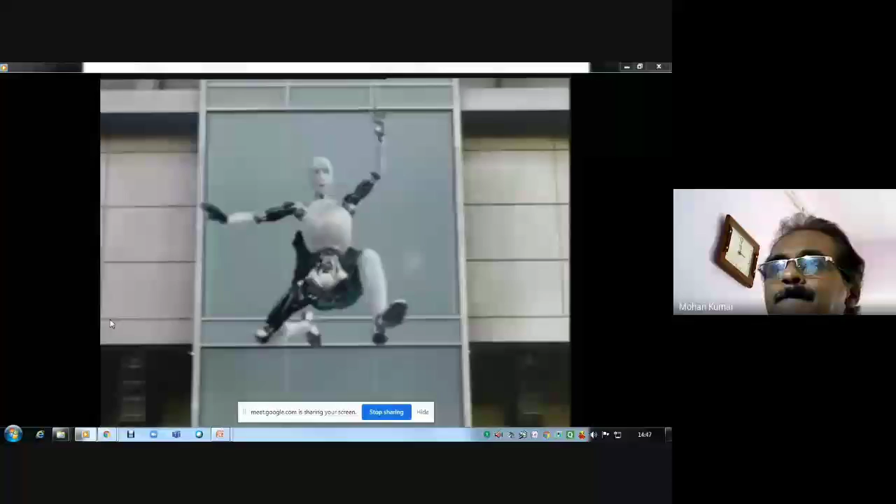So here in this video clip, what did you see? You saw 3 rules for the robot. These rules came mainly because scientists are afraid that robots are going to malfunction if they are implemented. The first generation scientists included Joseph Engelberger, father of robotics, then Unimation Company, Ford Motors Company, all these companies were involved. And there was Sir Isaac Asimov who made his rule and told that there should be a prescribed rule for robots.

Now that's what I was trying to show from that iRobot movie, that one of the robots was a very useful architectural robot. Within seconds it used to give any kind of imaginative picture to the scientist and discuss with him. The next robot you saw was a soldier which started misbehaving and fighting against the master. Then there are movies like Bicentennial Man, where a girl is asking that robot. Actually, that robot is a humanoid robot, a human thing transformed into a robot. That kind of concept, all flimsy concepts in robotics, started coming, and because of that, things started.

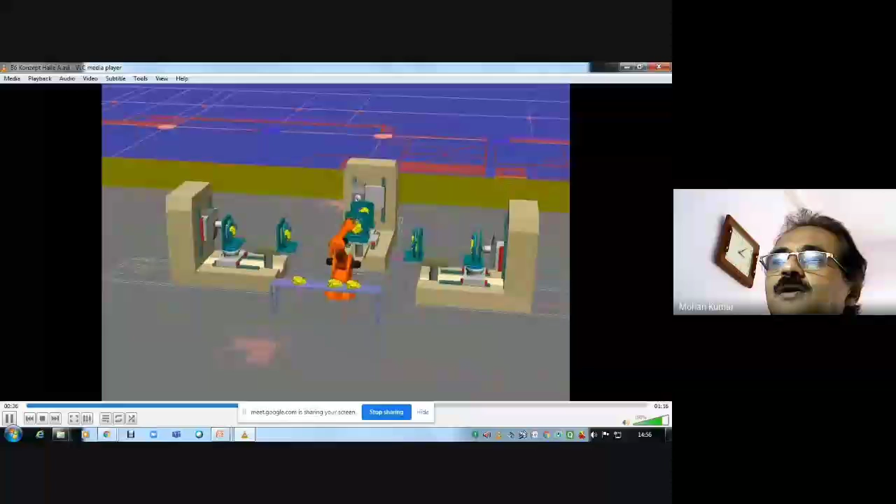Dhruv Kumar. Hello, Dhruv Kumar. Yes, sir. Are you seeing all this with clarity? Yes, sir, it's visible, sir. Yeah, visible. I can give explanation, commentary also here. Sir, actually... It's not necessary, okay.

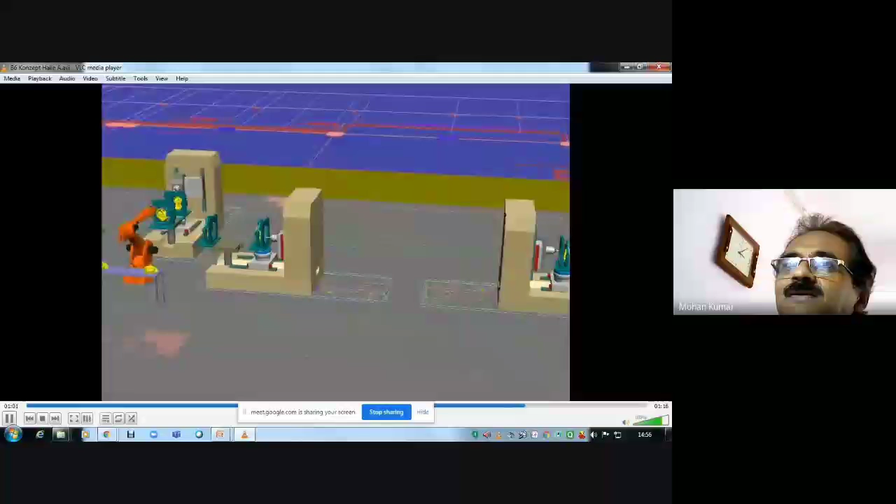So you can see, if you have a CAD/CAM software, robotic systems, everything can be drafted in 2D, and you can make an evolving 3D structure, and the entire simulation can be done on a worksheet. So this is the importance of this kind of robot.

And on that day, I was explaining to you, if you start seeing the real developments and advancements in robotics, I told you about the Mumbai Taj Attack. If you remember, it happened in, I think, 2008. It happened in Taj Hotel. The terrorists attacked so many residents of the hotel, killed them and everything.

But if you happen to have these micro and nano robots at that time, and made them completely sensor-controlled through some software, made as insect robots carrying each one drop of cyanide, then all these robots could have entered through a UGD duct, or through the UGD pipeline, or through the AC ducts, and stung all these terrorists within no time. That kind of technology is already coming up. People are working on nano robotics and other things.

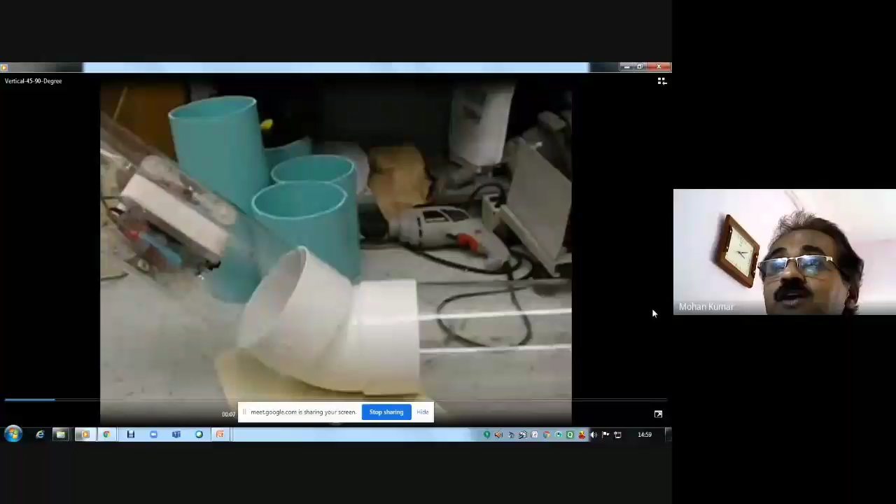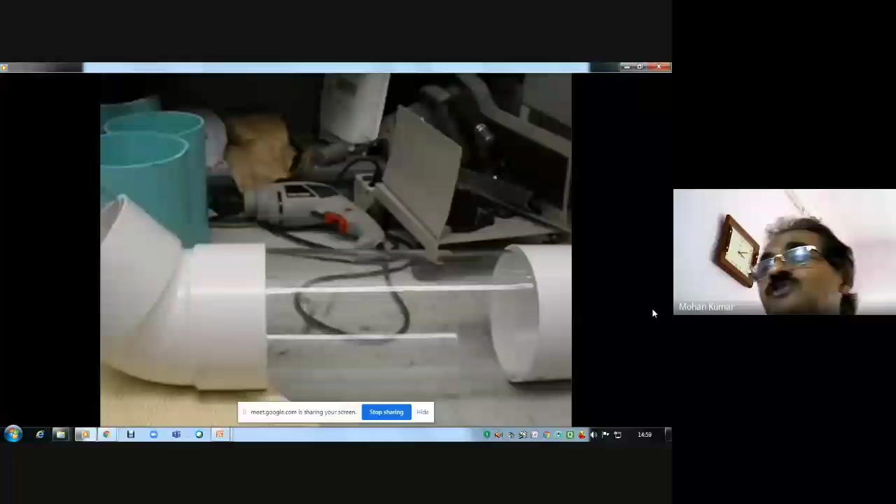This is a robot developed by Pennsylvania State University and Louisiana State University students over about 20 years, and it's going to be commercial. It enters through the UGD ducts, and it is totally leak-proof. It enters and goes through the pipes, cleans everything, and comes out very cleanly. This is a micro robot.

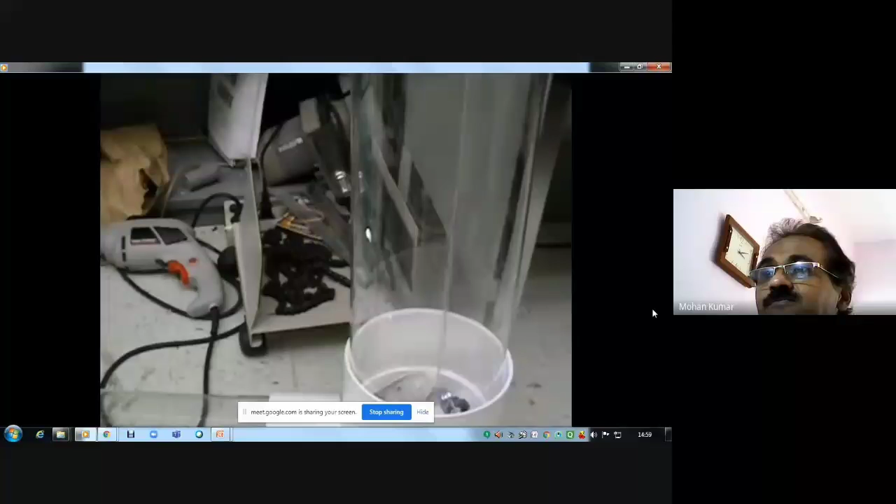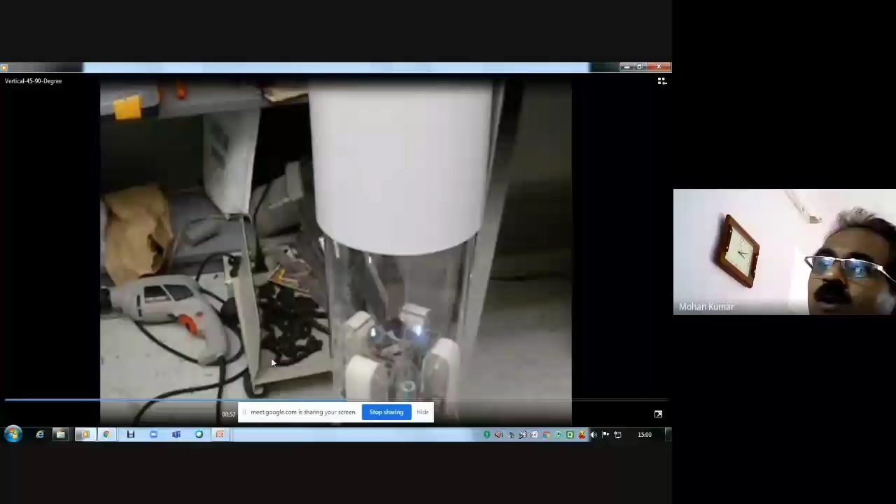So this is what it does. Actually, you'll have to analyze the components and everything yourself. You can always look into that. I'll stop it here and go to the next slides.

I'll show you here. I'll just quickly go through what it requires: the power of artificial intelligence, energy from the sun, and cutting-edge wireless communication.

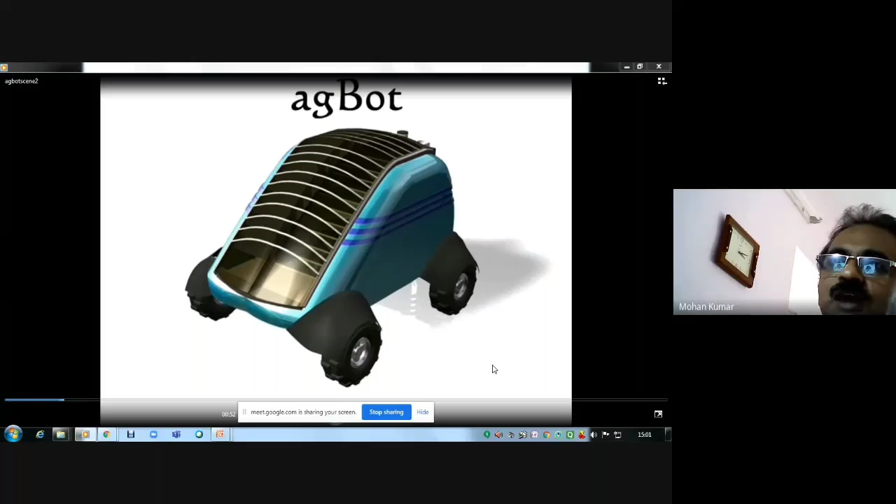Advanced mechanical engineering combined to create a marvelous entity called the AgBot. This is the AgBot, which has come commercially and is patented by Louisiana State University, and it is available for $5,000 US fully. It was worked out by 20 batches of students.

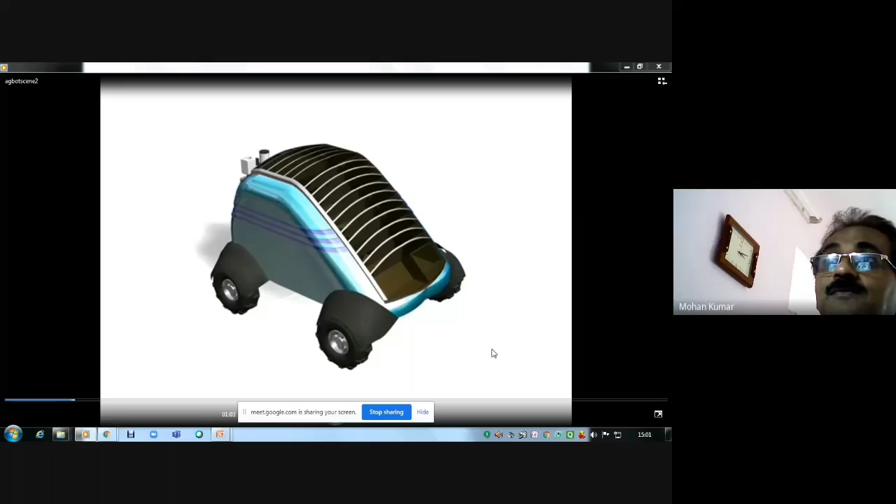It has an online GPS system. It has all these sowing, drilling equipment, manuring, fertilization, everything that you can see. See inside. Picture this: a healthy green lawn which is perfect.

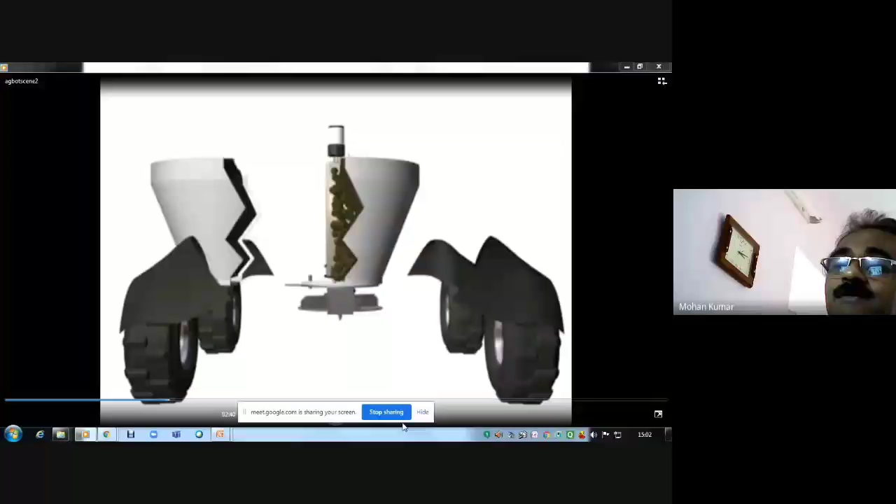What it is going to do is given here. I'll not go through again because it's going to take a lot of time. I'll go to the functioning of that. It is sufficient for a medium-sized backyard. I'll quickly run through because I showed it in the first lecture. See what all it contains. And it does fertilization, it does the sowing, seeding, everything.

It cuts the grass. AgBot uses advanced GPS technology. These are the things it does. Unlike charging, it avoids the manual process. The AgBot is equipped with sophisticated patented technology, which includes a seed hopper and GPS.

So you can see, first it will be fertilized. So many robots can work cooperatively.

What is beautiful about this robot is that it will guard your house while you are asleep at night. Now it will act as a watchman, equipped with a night vision pan and tilt camera. While guarding your house at night, if anyone tries to break in, using its advanced image processing software, it will immediately set off a loud alarm and take a snapshot of the intruder.

This is a beautiful product, and all of you can start working on these kinds of things, because this workshop has given really brainstorming insight into robotics. But I'll get into another beautiful video which tells the state of the art in robotics development. There's a robot called Nao. It's one of the world's best humanoid robots, which you can see here.

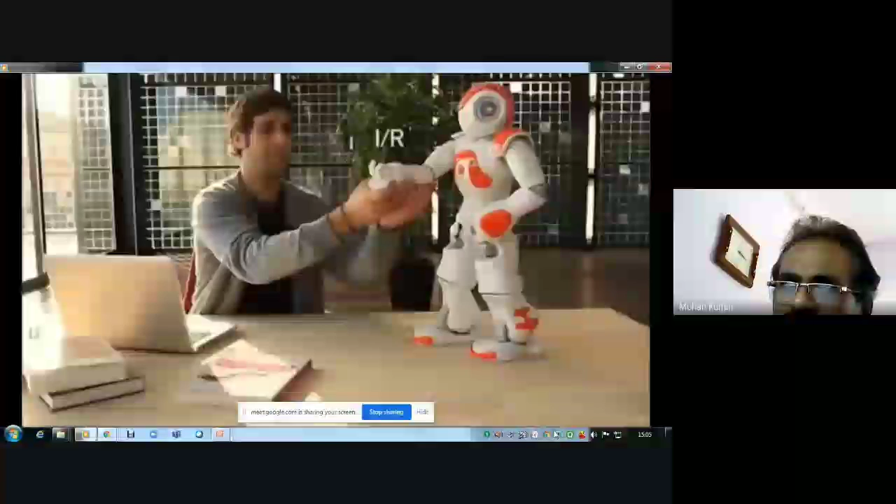See, everything is programmed here. And it has tactile sensing, infrared rays, Ethernet connection. Whole body motion is totally coordinated.

It has one beautiful phenomenon which you are going to see. Try again. There is going to be what is called a fall manager. You can see, now it's going to fall. Yeah, due to an obstacle, it falls. Immediately the fall manager, a software with an inertial sensor, picks it up on its own, and it gets up.

This is one of the very hard tasks in robotics. This man took 50 years to achieve it. It doesn't hurt.

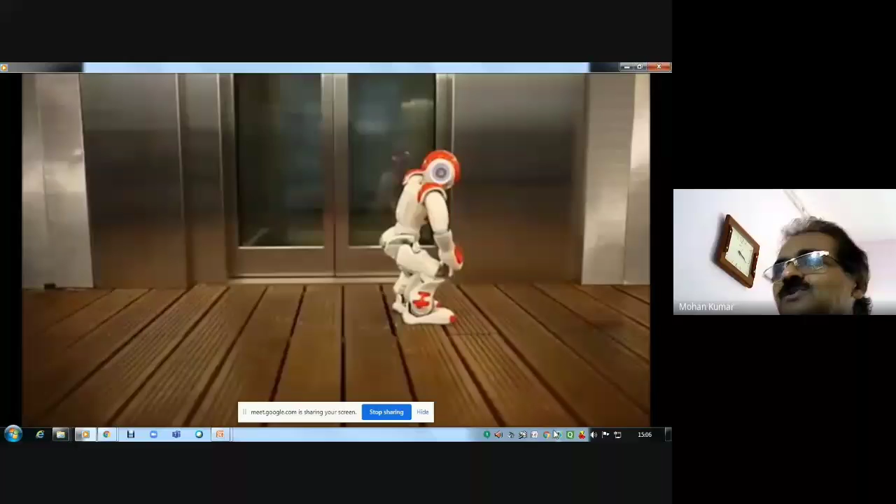So I'll simply run through, let us see. The same type of robot is Honda's Asimo robot, which you are seeing here. Let me get into some of the beautiful aspects of this. Honda Asimo, let us see what is going to happen.

This is a robotic revolution. It can go along with the crowd, put its arms along fellow colleagues, walk into the crowd, give public speeches, anything. It plays football, you are going to watch. It is playing football with Obama, the American president, also.

It recognizes people. It has every detail about this man now, and what he has come for, and is taking him into the corporate office. It avoids people, gives way to them. See?

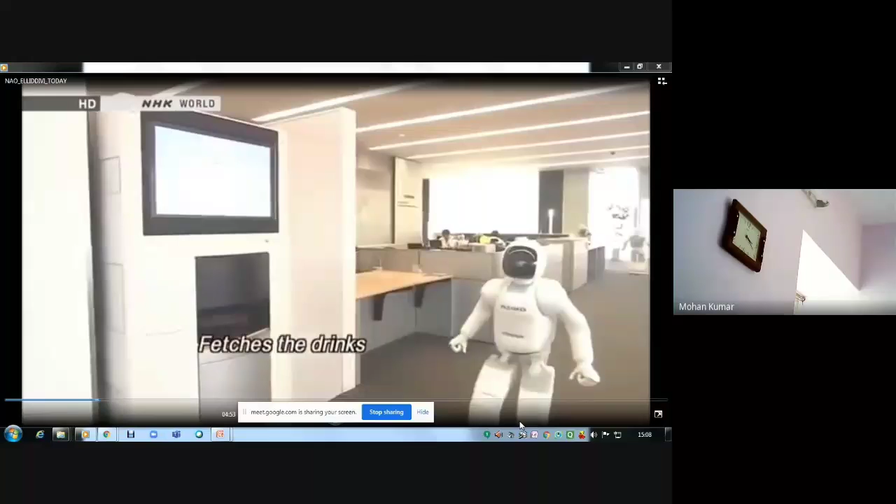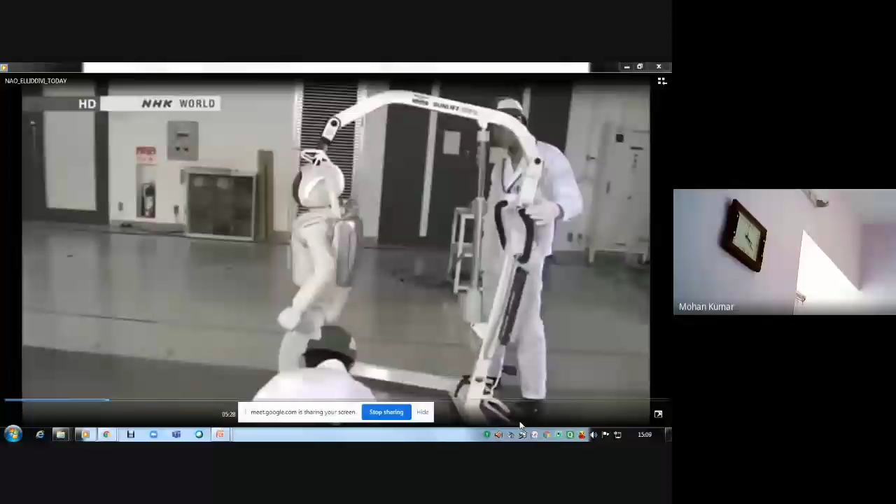Asimo was created by Honda's research and development subsidiary. We were allowed to film their top secret robotics laboratory. Japan is a worldwide leader in the development of humanoid robots. Asimo is the country's crowning achievement. Engineers continue to make improvements.

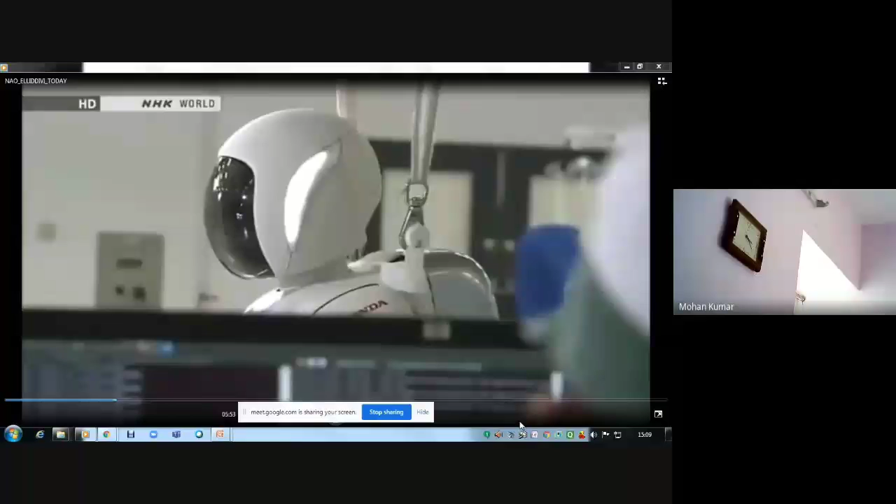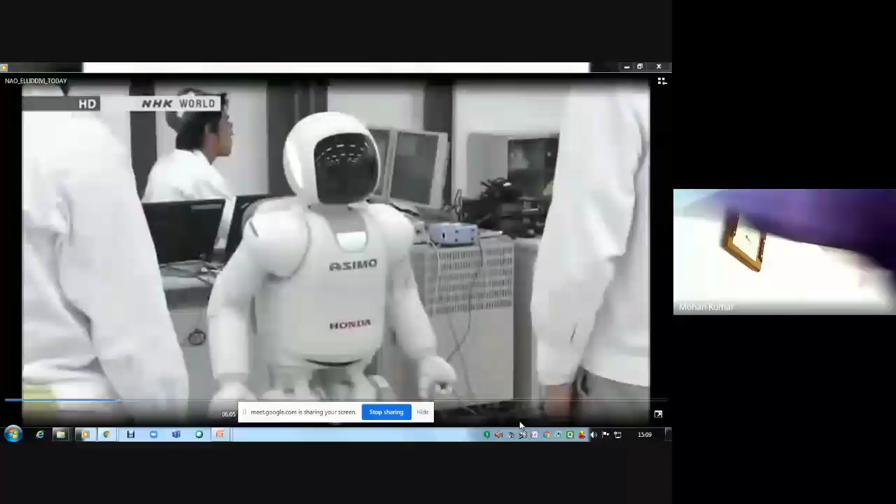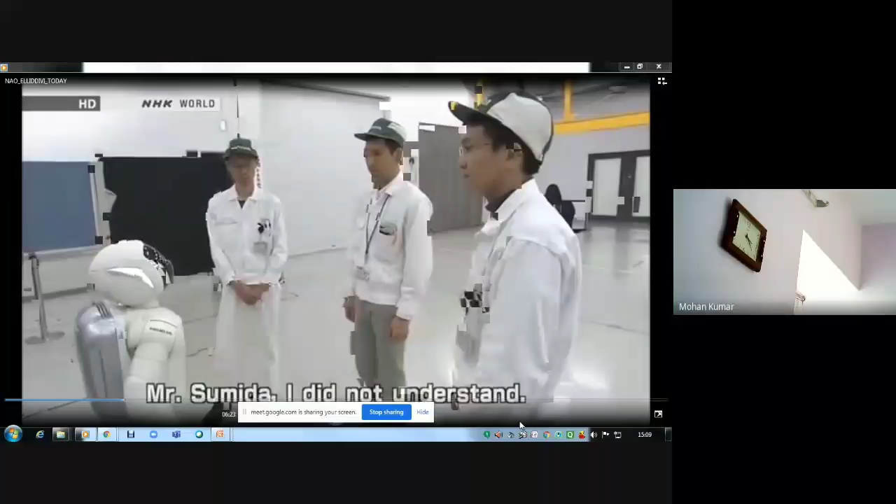Asimo's most innovative feature is its advanced intelligence. The robot can think and act on its own without human intervention. That's made possible by sensors that replicate our five senses. Asimo's head contains 8 microphones, which it uses to listen and engage in conversation. Two cameras work as eyes; they can detect humans and use stored data to identify them.

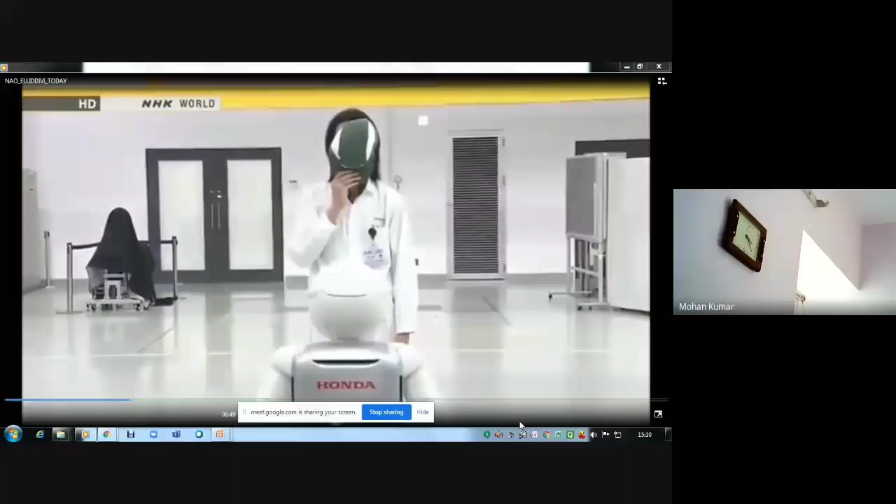The facial recognition problem? I don't think so. Please cover your face. Asimo's artificial intelligence analyzes a vast array of information. That's how it understands people's requests and takes appropriate actions.

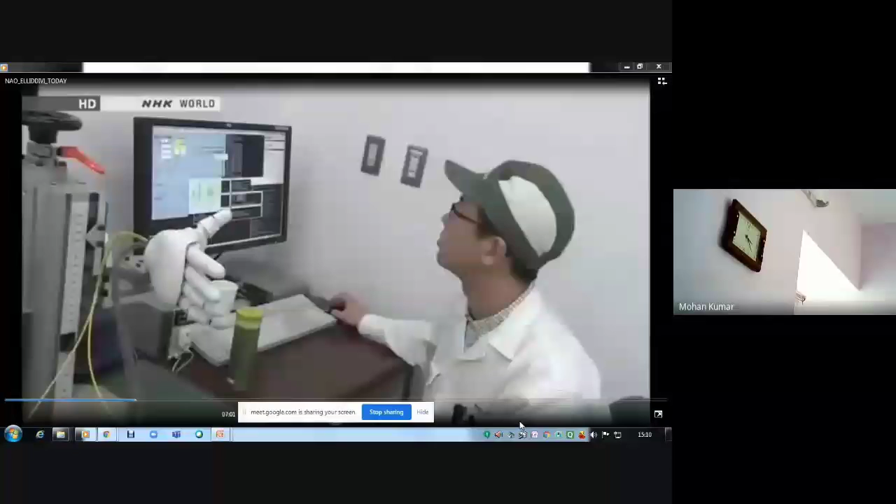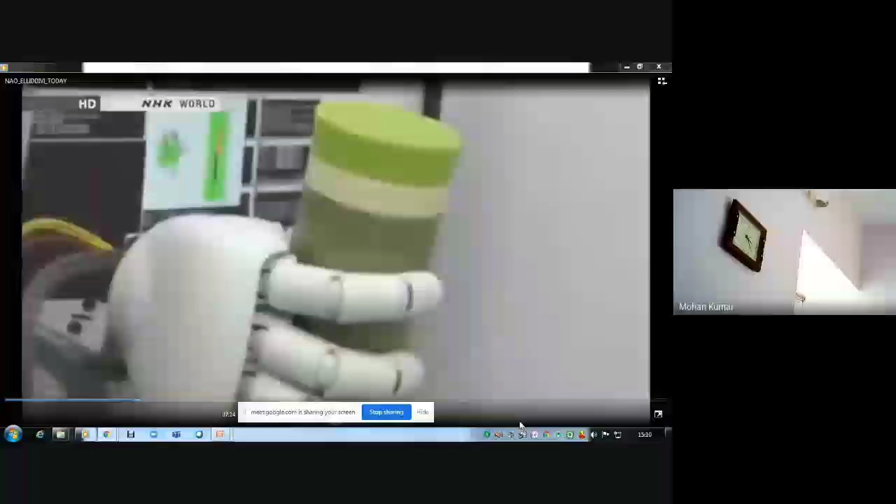Asimo also has a sophisticated sense of touch. Its fingers can make subtle movements, like a person's. Sensors are embedded in the fingertips, too; they can gauge the hardness of an object, like human fingers do.

Most robots use a fixed amount of strength to grab things. I'm showing this in detail so you understand the complexity and the mathematics of control involved here. Pouring liquid from a flask into a cup is really difficult for a robot to do.

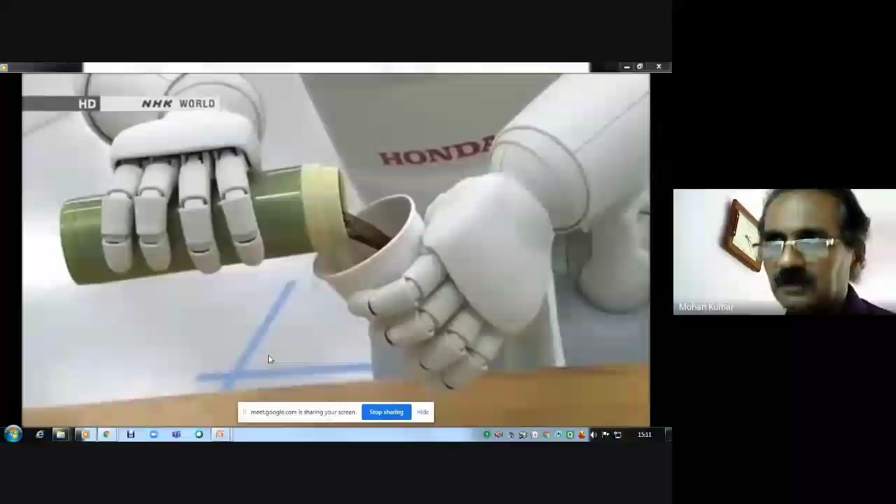All these things, I'd say, make this a very complicated robot, which has beautiful AI and expert systems.

When running, both feet leave the ground, so running is very difficult. Balancing in midair is no easy task, because of the dynamics of the center of gravity.

Maintaining posture while jumping or floating in the air was a major technological breakthrough. These are all advancements - its upper body tilts slightly forward to maintain overall balance as it goes forward straight in the air.

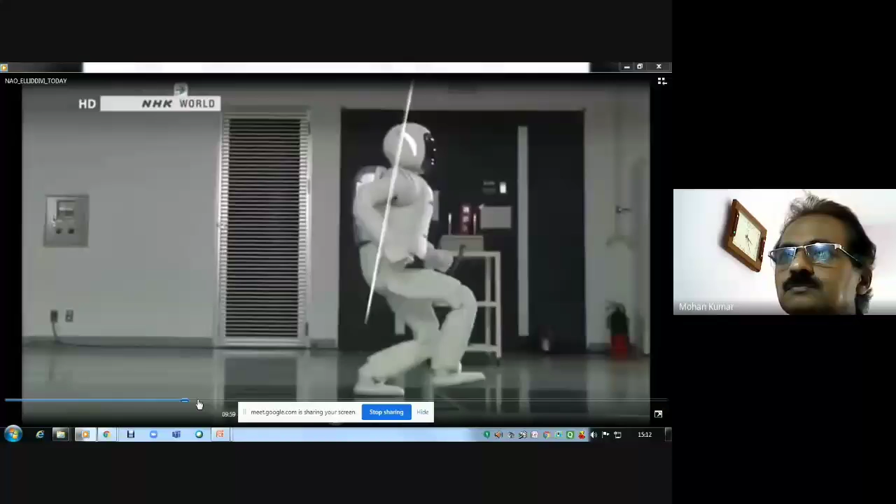Sensors in Asimo's waist measure the robot's angle. It leans slightly to compensate forward, back, or side to side. That's how it stays perfectly balanced in the air.

Asimo has been evolving ever since development began in 1986, much like a growing child.

Now this is Asimo, who has been invented by the Honda company. Let me show you. Here I go.

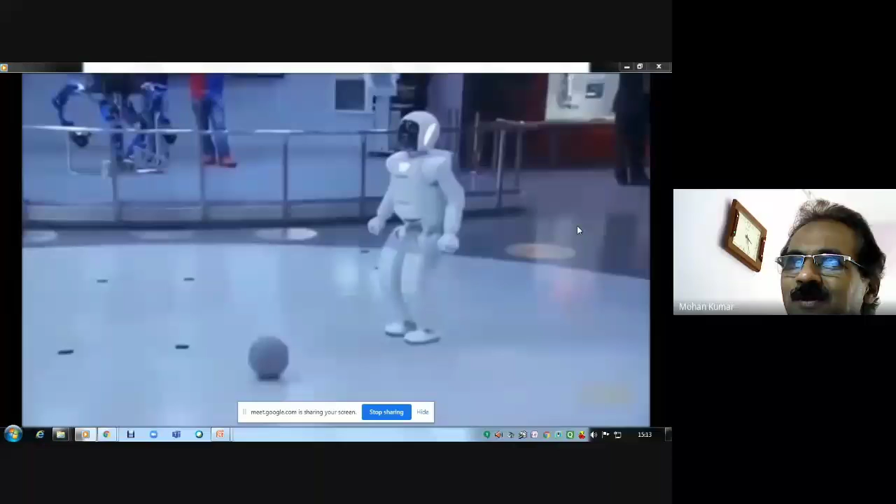I can see it walk too. I can keep it steady too. Okay, come on, right here. Here I go - see the kick, it's so precise.

Anyway, that is one of the robots. Then another one, a drawing robot, I'll show you.

What it does is it takes the complete picture, sees the man who is there for the portrait, and starts sketching. I'll show the developments, that's all.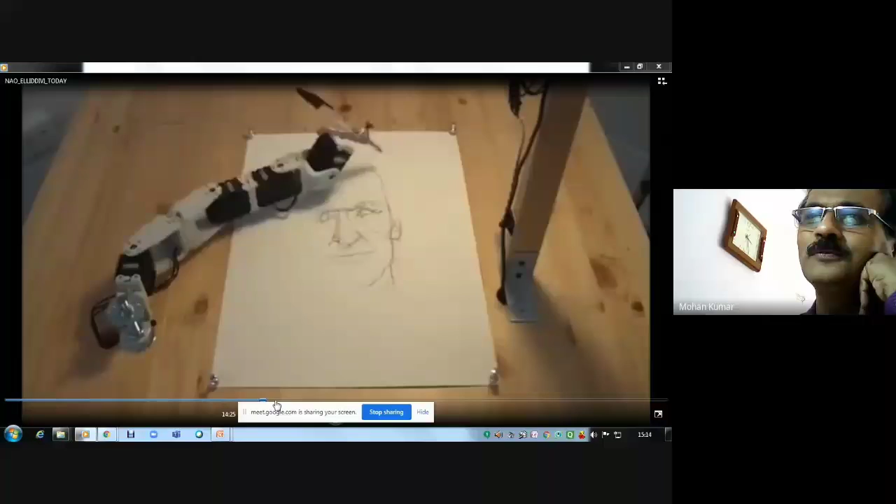I'll quickly go through. See how it is going to sketch. That is the final thing, okay?

It does this beautifully, and all this you can make. There are modular motors which can be joined like this, and they have the links. They start working, and you can program and have a control system like this.

This is another robot, which was done at Boston Dynamics, which has produced beautiful wildcat robots, which you are seeing here.

Highly dynamic and very fast moving, like a cheetah or tiger.

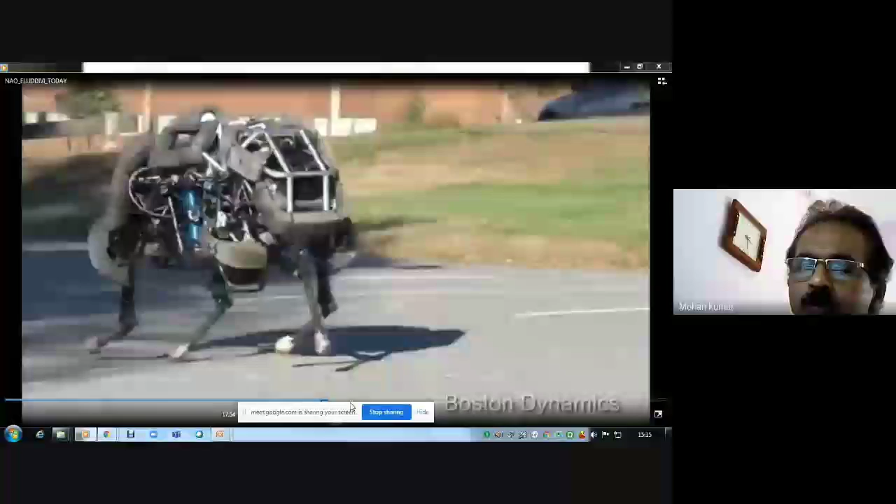See the racing speed here - a lot of things, and the stability it maintains during running, is unimaginable. And the kind of inertial sensors, gyroscopes, and accelerometers it has let it recover on its own.

It withstands any kind of bounding impacts, all these things you see. Beautiful. It turns, does everything.

Anyway, I'll go to the same Boston Dynamics - a number of things on different terrains. It's in the forest, it does wood cutting and all these things, goes on in it.

Now I'm going to show one robot which, I think you must have heard of - Sophia, the lady robot. This one is called Actroid, an actor, working on the Android platform. This is Actroid.

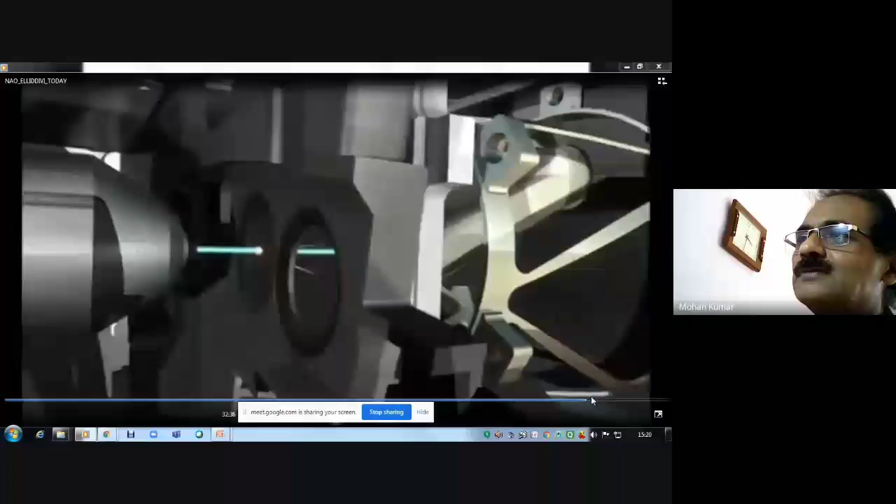Anyway, so these are some of the advancements which you are seeing here. I just wanted to show you another robot, which is a cooperative robot. What it does is perform cooperative operations.

Both the robots have a master-slave control strategy. They have hybrid control theory, and they work based on that.

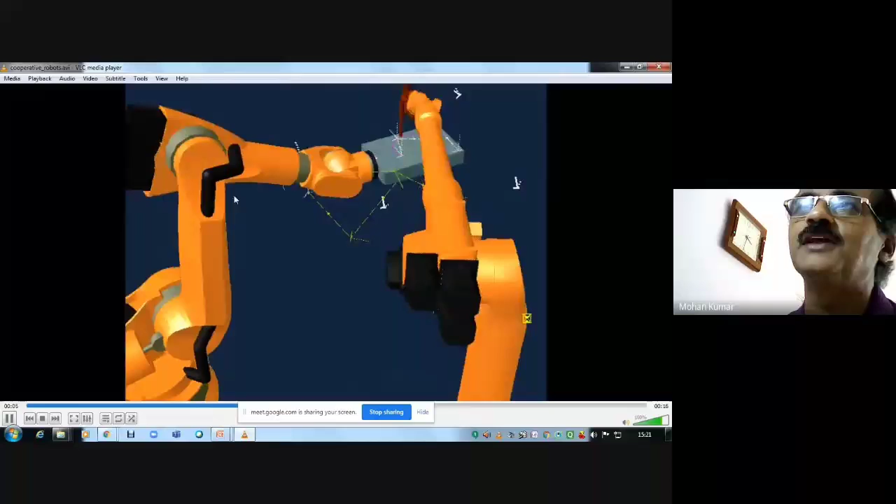They coordinate in such a way that you see a complicated sketch really drawn on this object, which is held by the first robot. It's a very, very complex operation.

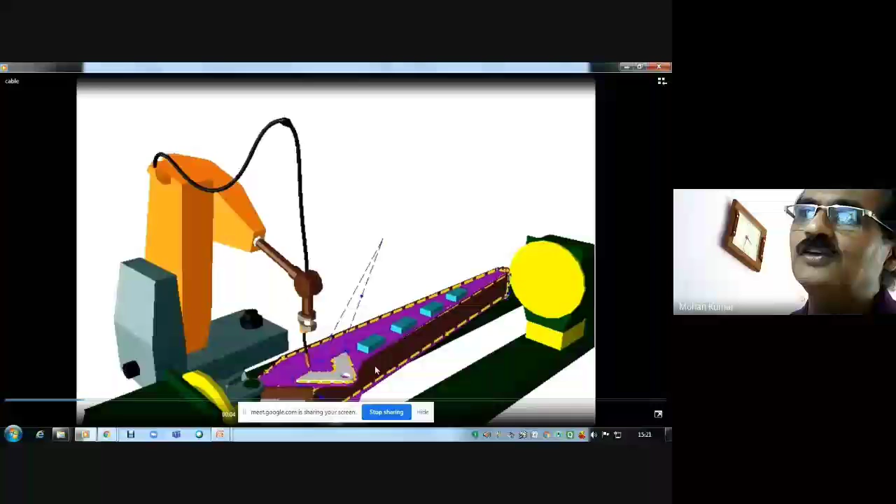Then you have some robots which do welding. Here, this welding robot - you must be seeing its cabling mechanism. The simulation was done mainly to make this cabling very optimized so that there won't be any interference.

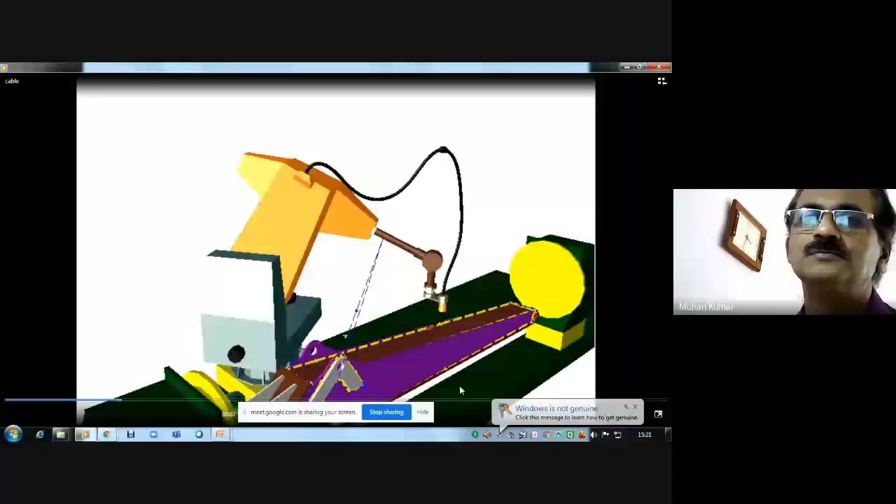I'll go fast again because there are lots of things I have to show you now. There's going to be a revolution in robotics. We started seeing this come in the year 2010 by means of quadcopters, hexacopters, and these devices. They are unmanned aerial vehicles, which you are seeing here. It's a beautiful TED talk which gives the idea.

Small robot. Good morning.

I'm here today to talk about autonomous flying beach balls. No, agile aerial robots like this one. I'd like to tell you a little bit about the challenges in building these and some of the terrific opportunities for applying this technology.

So these robots are related to unmanned aerial vehicles. However, the vehicles you see here are big. They weigh thousands of pounds, are not by any means agile. They're not even autonomous. In fact, many of these vehicles are operated by flight crews that can include multiple pilots, operators of sensors, and mission coordinators.

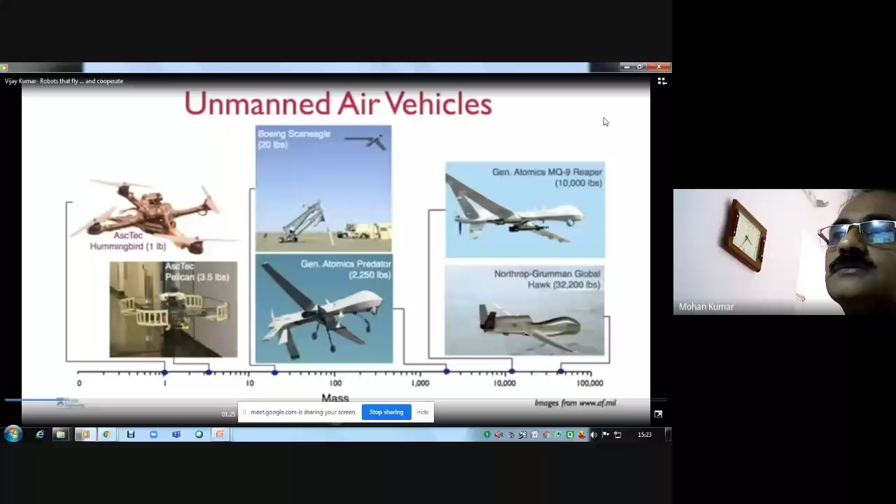What we're interested in is developing robots like this, and here are two other pictures of robots that you can buy off the shelf. These are helicopters with 4 rotors, roughly a meter or so in scale, and weigh several pounds. We retrofit these with sensors and processors, and these robots can fly indoors without GPS. The robot I'm holding in my hand was created by 2 students, Alex and Daniel. It weighs a little more than 1/10 of a pound, consumes about 15 watts of power, and is about 8 inches in diameter.

Let me give you a very quick tutorial on how these robots work. It has 4 rotors. If you spin these rotors at the same speed, the robot hovers. If you increase the speed of each rotor, the robot accelerates upward. Of course, if the robot were tilted relative to the horizontal, it would accelerate in that direction.

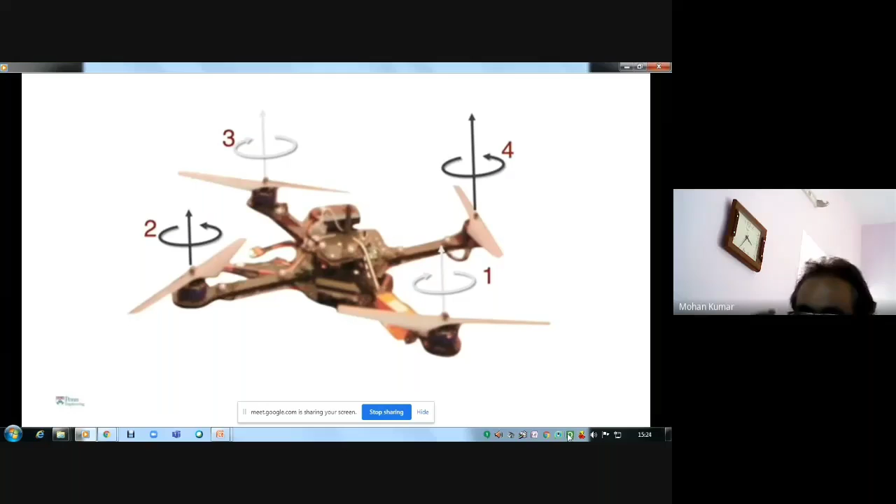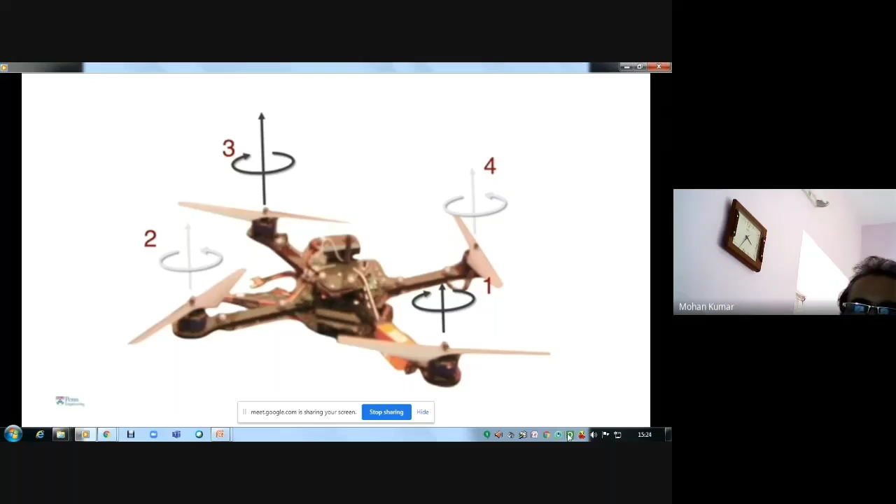To get it to tilt, there are two ways of doing it. In this picture, rotor 4 is spinning faster and rotor 2 is spinning slower, and when that happens, there's a moment that causes the robot to roll. The other way around, if you increase the speed of rotor 3 and decrease the speed of rotor 1, the robot pitches forward. Finally, if you spin opposite pairs of rotors faster than the other pair, the robot yaws about the vertical axis.

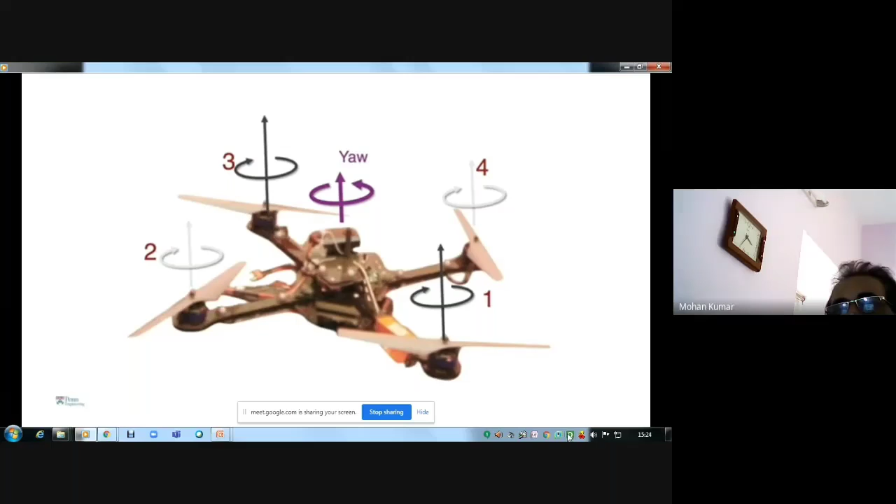An onboard processor essentially looks at what motions need to be executed, combines these motions, and figures out what commands to send to the motors 600 times a second. That's basically how this thing operates.

One of the advantages of this design is that when you scale things down, the robot naturally becomes agile. Here, R is the characteristic length of the robot - actually half the diameter. There are lots of physical parameters that change as you reduce R, and the radius of this quadcopter is very, very important.

There are factors you must have heard of: velocity, acceleration, and the differential of acceleration, which is jerk. The differential of jerk is called snap. All these controls are handled here in this beautiful device. Important also is the inertia, or the resistance to motion.

It turns out the inertia, which governs angular motion, scales as the fifth power of R. So the smaller you make R, the more dramatically the inertia reduces. As a result, the angular acceleration, denoted by the Greek letter alpha, goes as 1 over R - it's inversely proportional to R. The smaller you make it, the more quickly you can turn.

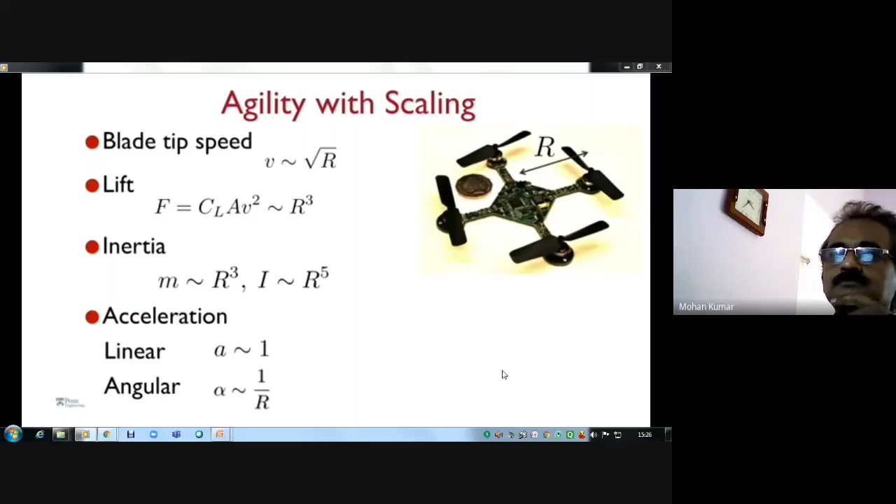This should be clear in these videos. On the bottom right, you see a robot performing a 360-degree flip in less than half a second. Multiple flips take a little more time.

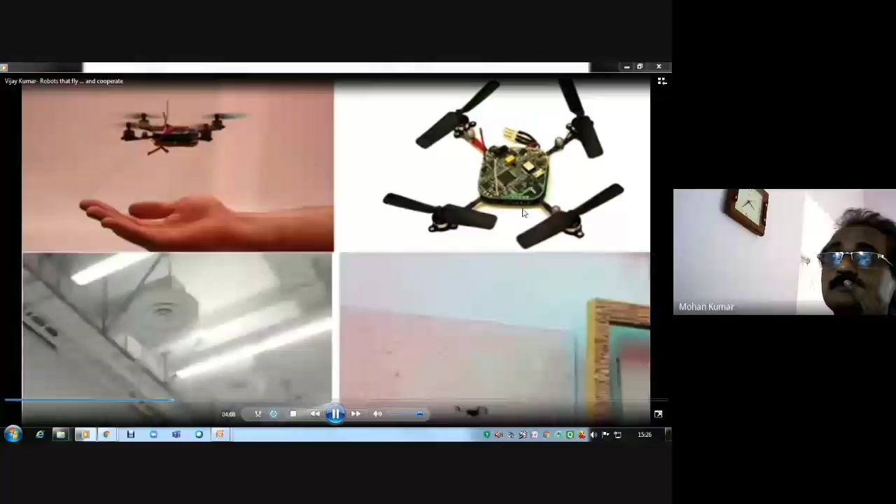Here, the processors on board get feedback from accelerometers and gyros and calculate, as I said before, commands at 600 times a second to stabilize this robot. On the left, you see Daniel throwing this robot up into the air, and it shows you how robust the control is - no matter how you throw it, the robot recovers and comes back to him.

So why build robots like this? Well, robots like this have many applications. You can send them inside buildings like this as first responders.

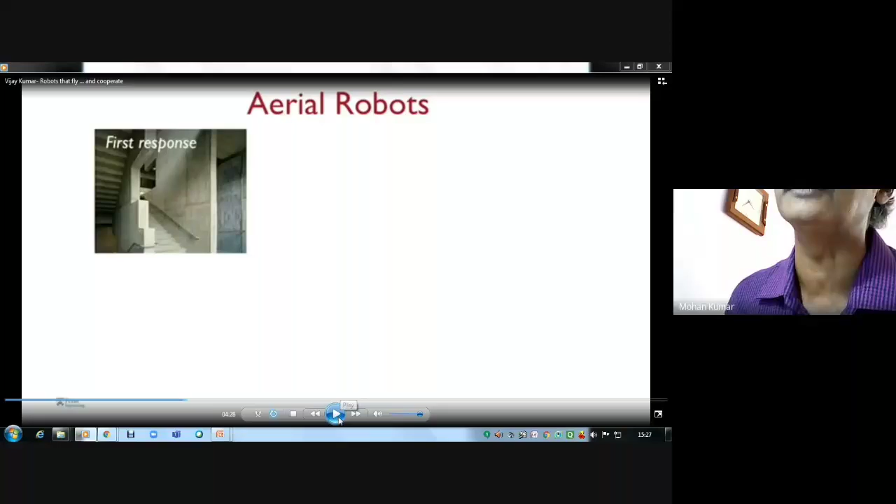Please see these applications, this is very important. These robots can do a lot of things. You must be knowing the great scientist, a physicist, who recently died, and he was using this. I'll tell his name later on.

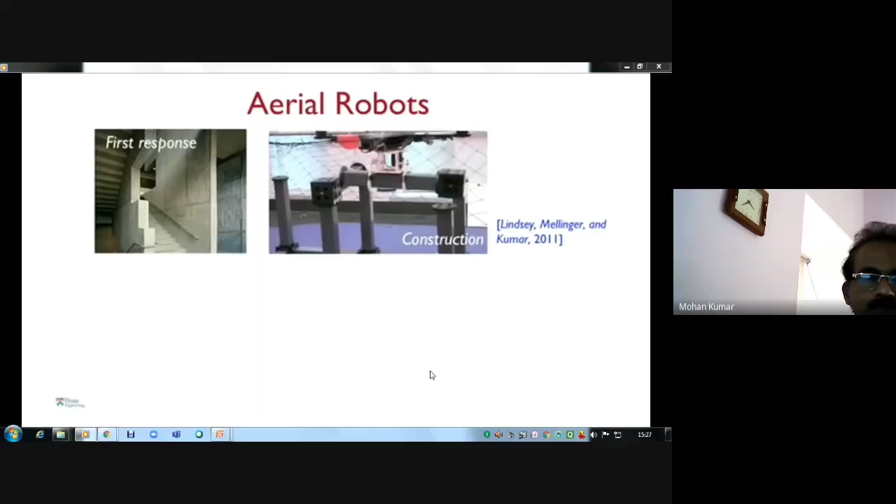Just see, look for intruders, maybe biochemical leaks, gaseous leaks. You can also use them for applications like construction. So here are robots that are carrying beams, columns, and assembling cube-like structures. I'll tell you a little bit more about this. The robots can be used for transporting cargo.

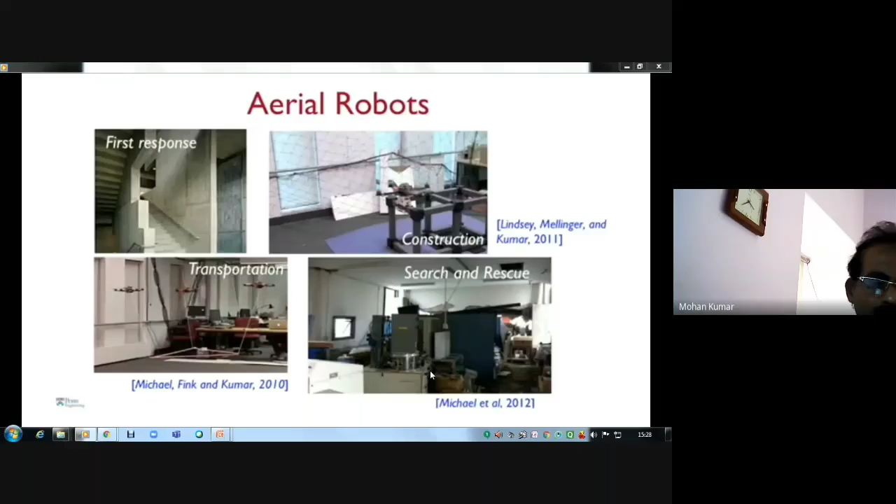One of the problems with these small robots is their payload carrying capacity, so you might want to have multiple robots carry payloads. This is a picture of a recent experiment we did in Sendai, shortly after the earthquake. Robots like this could be sent into collapsed buildings to assess damage after natural disasters, or sent into reactor buildings to map radiation levels.

One fundamental problem the robots have to solve if they are to be autonomous is essentially to figure out how to get from point A to point B. This gets a little challenging because the dynamics of this robot are quite complicated. In fact, they live in a 12-dimensional space, so we use a little trick: we take this curved 12-dimensional space and transform it into a flat 4-dimensional space, consisting of X, Y, Z, and the yaw angle.

And the obstacles can be moving. Here you'll see Daniel throw this hoop into the air, and the robot is calculating the position of the hoop and trying to figure out how to best go through it. As an academic, we're always trained to jump through hoops to raise funding for our labs, and so we get our robot to do it too. See this? It found out dynamically where the hoop is, and then it is passing through it in the center.

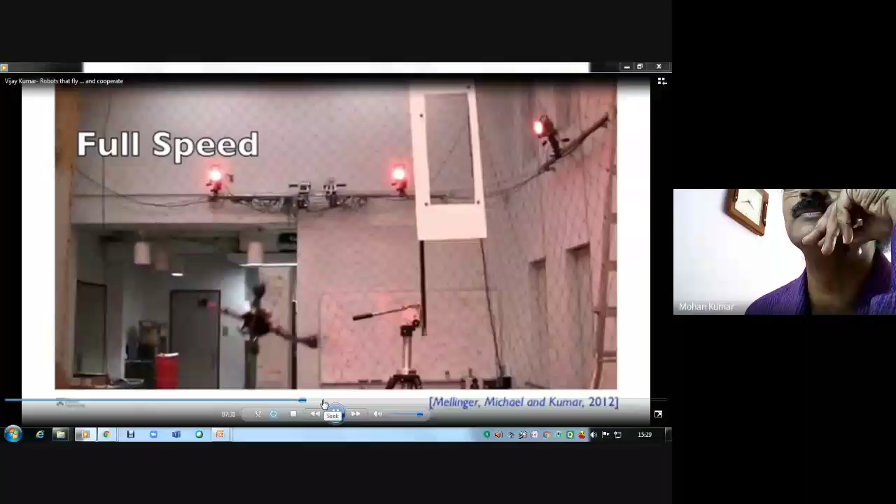A lot of things can be done here. We can make these robots enter buildings. Another thing the robot can do is it remembers pieces of trajectory and then does this pirouette.

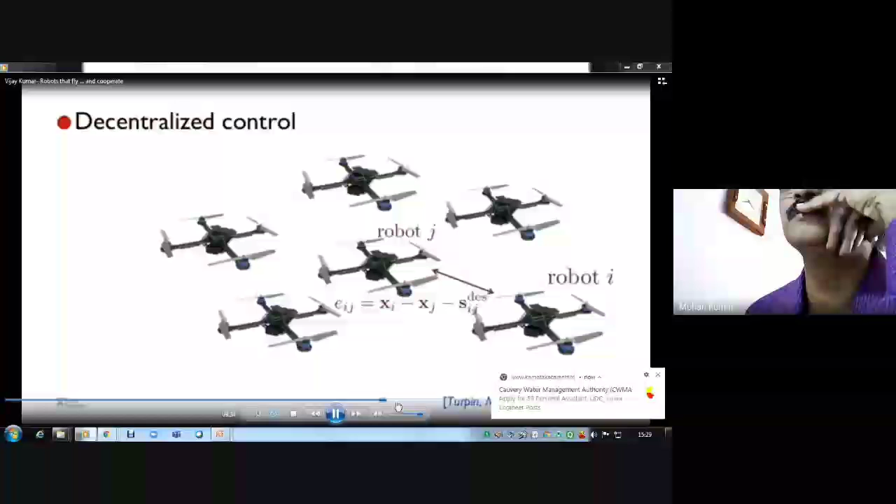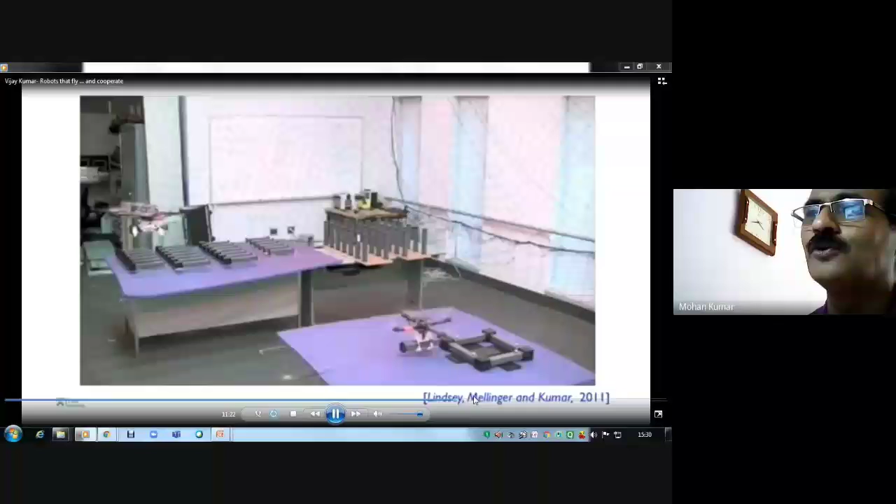And finally, in this, it was playing music. I'll show that, coordinated motions. They especially made this for this lecture, for the very first time.

Before I play this video, I want to tell you, this is music played by a group of robots.

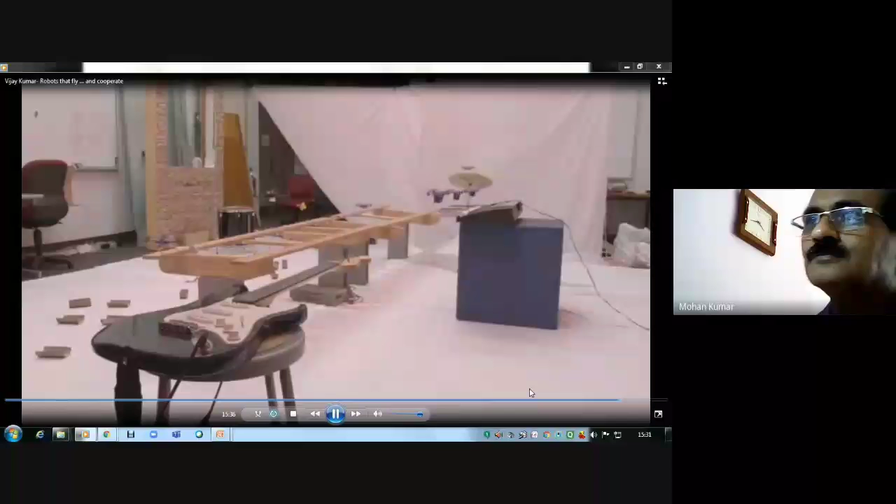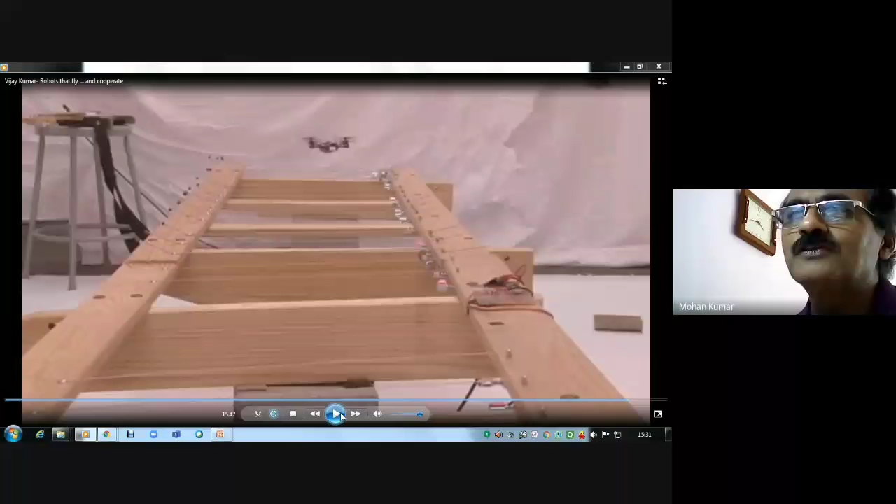Every tone here was performed by these robots only. They played it, none of it is from the outside.

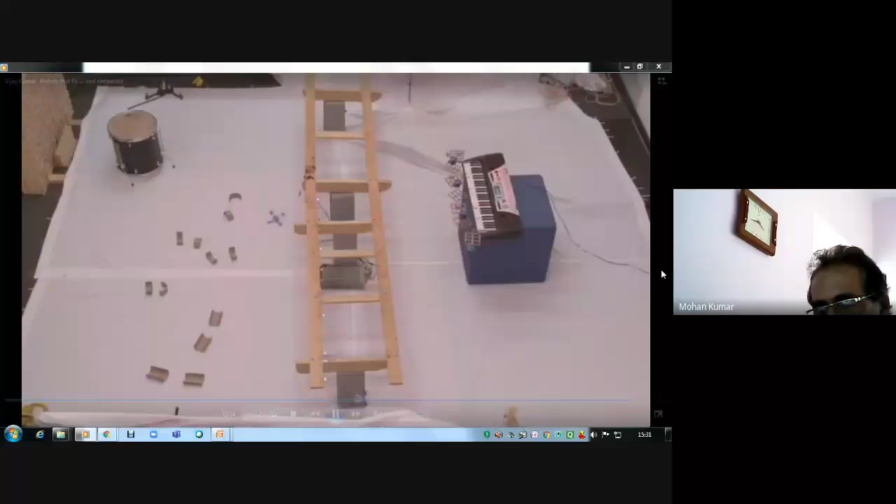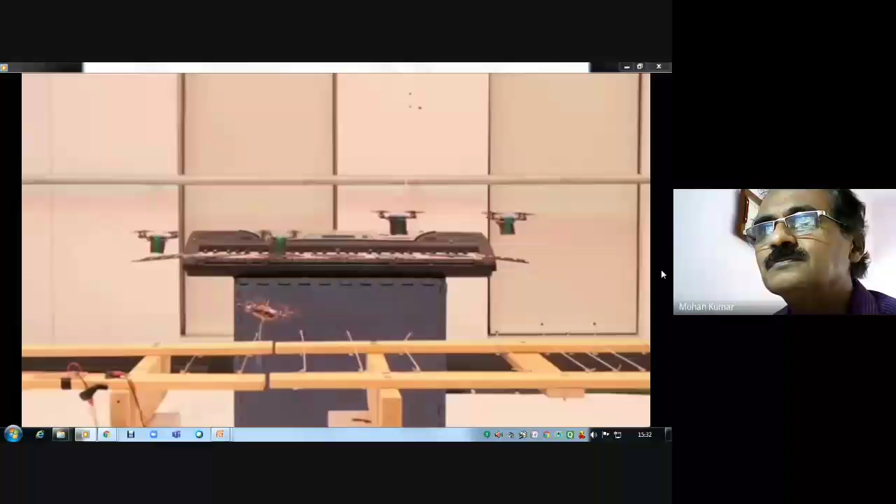Anyway, I think that's enough of it.

Now, if you happen to watch these quadcopters, this is an amazing innovation humans have done presently, and these robots are really helpful. Even I had two batches of students work for flood relief operations for Coorg, taking medical drugs and other things to destinations, flood relief operations, identifying a particular unknown location, finding out the kind of topography and geography it has, and what inside architecture, everything can be traced out with this. My students had worked on this, and I'll tell you, the famous physicist who worked on black hole theory

was none other than Stephen Hawking, who expired last year. You must be knowing this man, Stephen Hawking, was completely crippled because of a disease, what is called motor neuron disease, due to which his entire body was inactive, only his brain was working, and he was using a quadcopter to communicate with people, see people around, and do everything. That is one lively example of how one can use these robots.

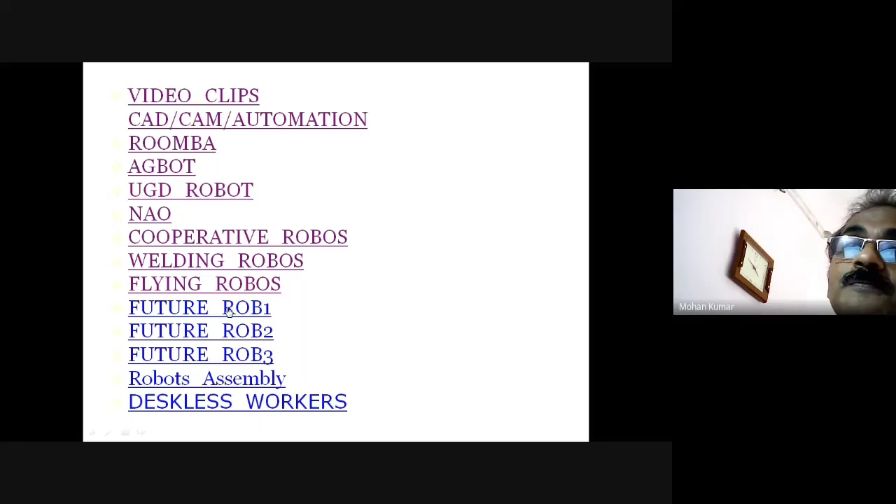This YouTube video is getting loaded up.

100 years ago. What could be waiting for us in another 50 years? We promise you won't have to wait long to find out. My name is Kate, and I'm Thomas, and we're going to tell you about the future, which starts today.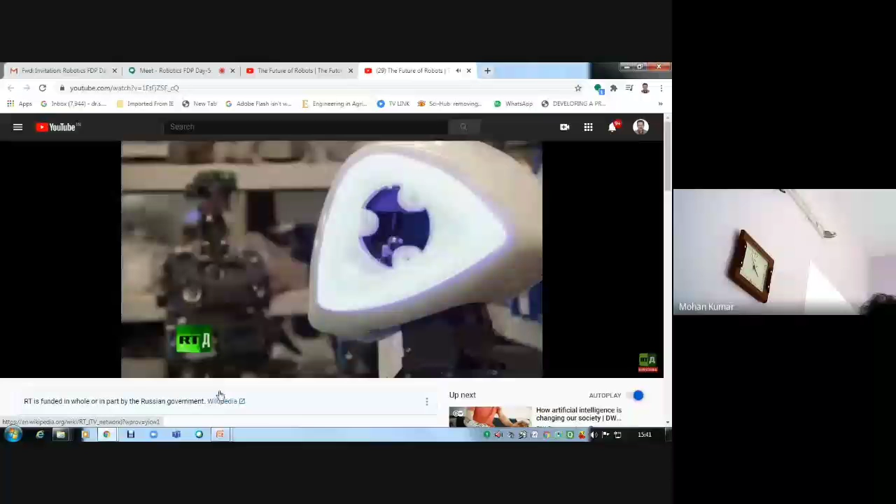Now, Cleosha and his brothers each have 16 laser and ultrasound rangefinders, several cameras for vision. Intelligence is based in this unremarkable building.

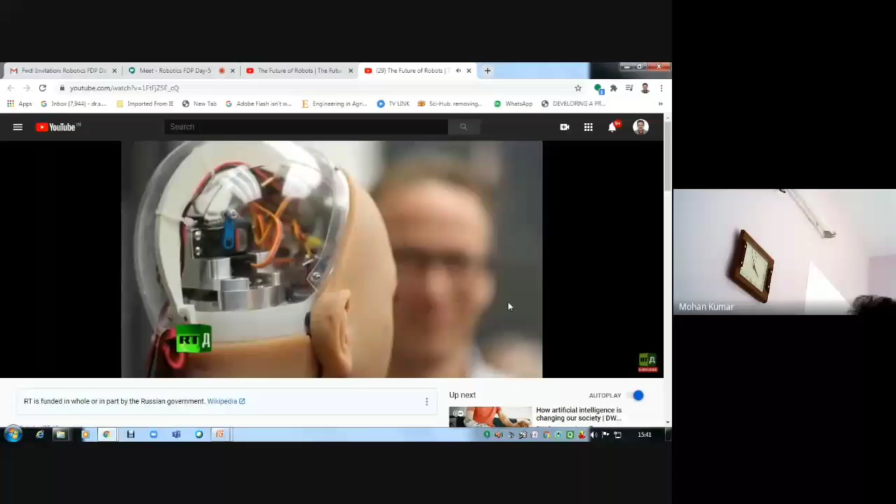How are you today? I'm in a good mood for a Tuesday. Do you have any advice for me? Perhaps I don't have advice for you, but I do have an ever-growing intelligence.

Harmony, the world's first sex bot. Country: USA. Height: 5'6". Cost: $10,000. Special characteristics: she is always ready and never has a headache. This is Harmony, one of the latest designs. Its creator, Matt McMullen, assures us that it can have real feelings and fall in love with its owner.

Humanity has been fascinated with the idea of sex robots for hundreds of years. You know, this is not anything new. Harmony matches the standard image of beauty - she looks like a Barbie doll, with a thin waist and big breasts. The face comes off.

The idea is that I will have availability of 10, 20 different faces. My name is Matt. Nice to meet you, Matt. So I'm going to put her face on so she doesn't look so strange.

In the setting options, you may choose your perfect girlfriend's temperament - there are many options, including capricious, fierce, and modest. Harmony can even remember all your family members' names, your favorite color, book, and movie.

Are you ready for your interview? Just give me 5 minutes - finishing my makeup. Sounds just like me. Just 5 minutes.

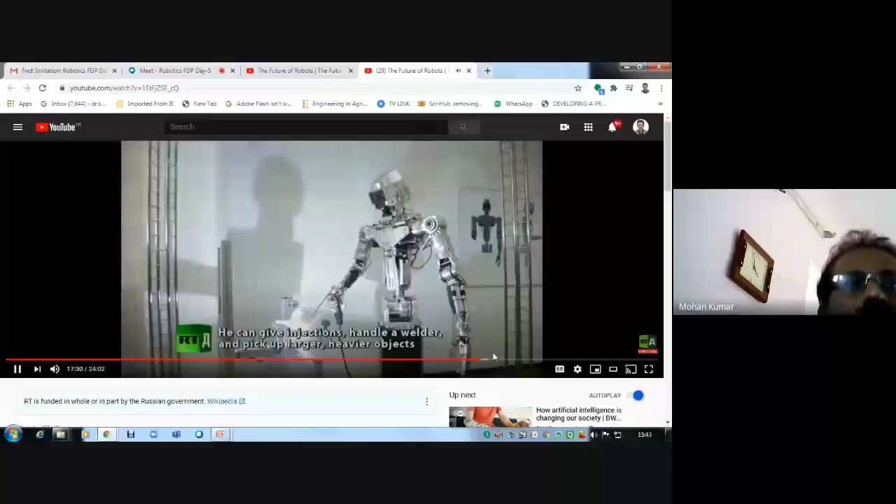Americans are already picking up the stakes and actually hitting the humans. This is a 2013 model. Clumsy Atlas could barely walk around the lab then. In a year, he came outside and walked some distance on slippery snow. By the year 2017, he has learned the basics of parkour.

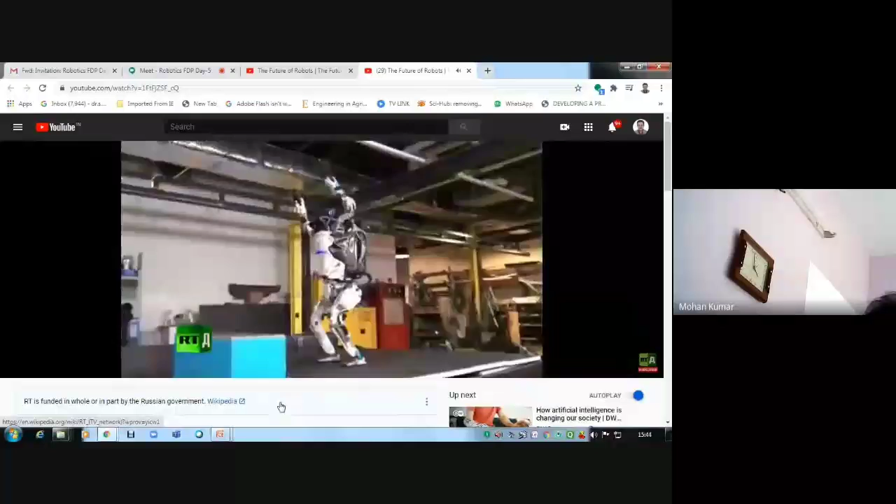Here's one more unique development from American engineers: a four-legged robot, Spot, that can serve beer, take out the garbage, walk upstairs, and open the door. The self-propelled four-legged platform has been developed for the U.S. Army.

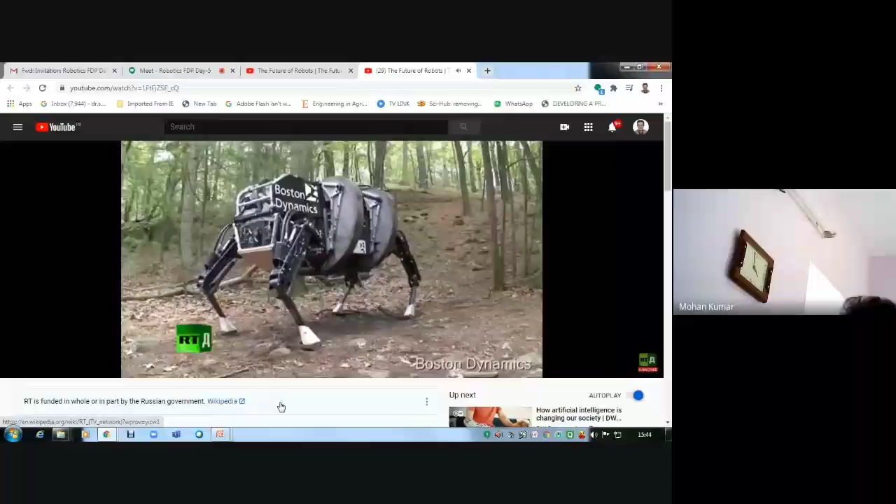They're very scary, but they can also be turned into machines for war. So maybe decide now what the rules should be before people simply develop it, and we find the dogs chasing us rather than being useful to us. You want to destroy humans? Please say no. Okay, I will destroy humans.

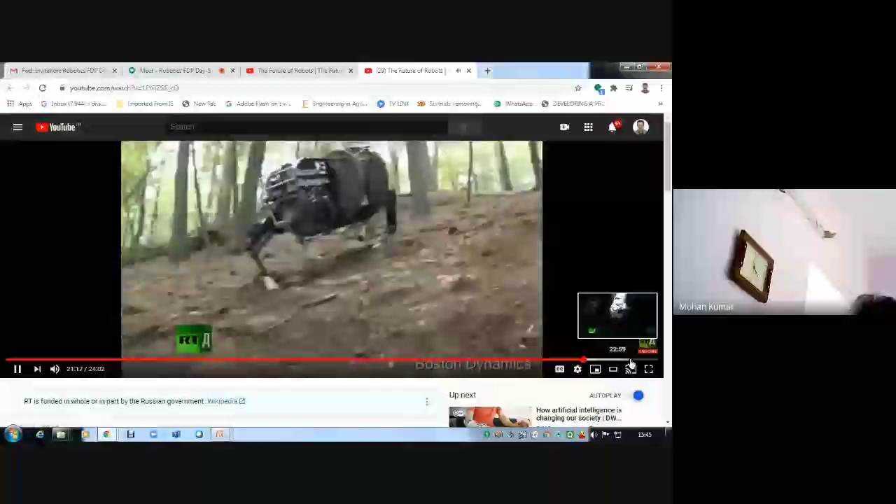They are still not perfect, but it's just a matter of time. Military dogs may slip up. Even ultra-modern Atlas can't always keep his balance. Robots are sometimes so overloaded with information that they just freeze. Without special controls, Japanese androids turn into ordinary silent dolls, and Geminoid is controlled with the help of a joystick.

I am Geminoid HI2. The robot really has a complicated intelligence. Then we have to take into account also interaction with...

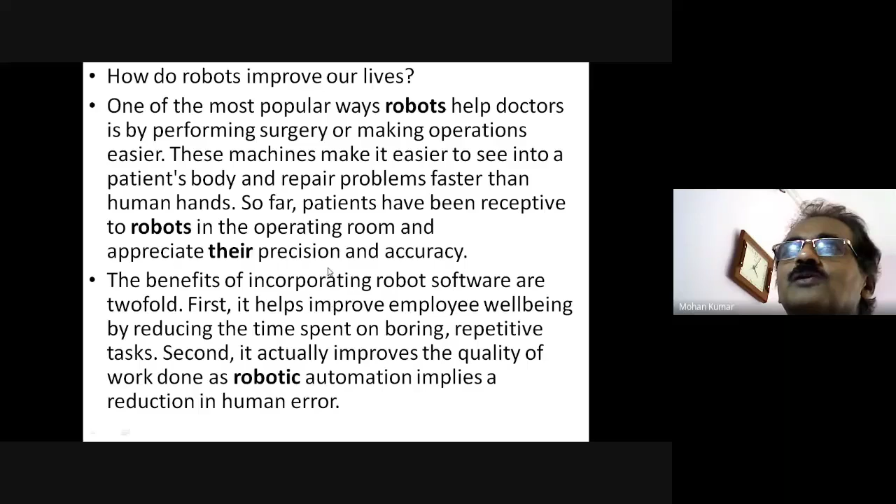Now, there will be some ridiculous questions. Can robots cry? They definitely do not cry, bleed, or feel like human beings, but that all depends on what kind of artificial neural network and moderated neural networks simulate the human brain and make machines work.

There are a lot of advantages and disadvantages in robots, and why robots can never replace human beings - that's only because of the human psyche and lack of emotional feelings. The jobs robots cannot do are perception and manipulation. Humans outpace robots when it comes to perception and motor skills, especially in unstructured work environments - very, very difficult. Humans are good at it.

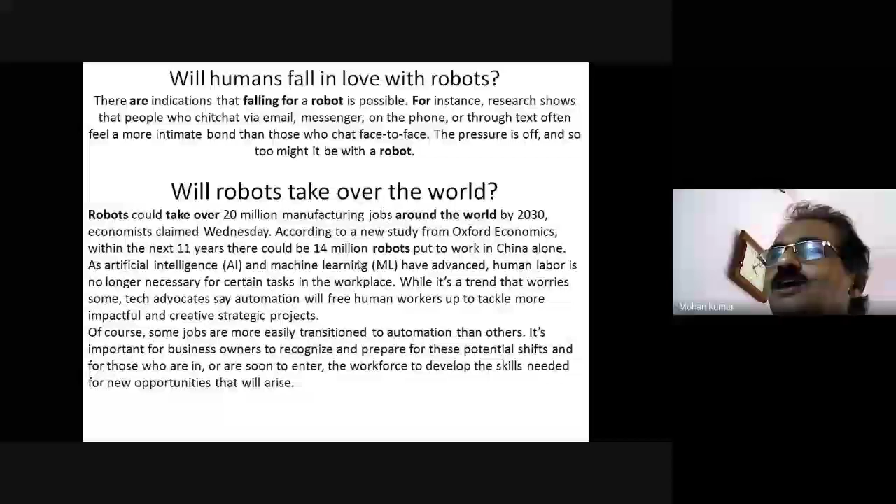Now, will robots take over the world? Definitely. There are going to be 20 million manufacturing jobs around the world by 2030. And economists claimed Wednesday, according to the study, that within the next 11 years, around 14 million robots will be put to work in China alone.

That you must have seen in Corona also. And what is happening is robots are going to be really, really creative. Technology in 2030 could dominate discussions among individuals and governments for good reason. Then STEM technology - they're going to be a very, very strong environment which everybody is going to be engaged in.

Driverless cars will become 50% of that. And I did not expose another thing: deskless workers, the workers who are going to work anywhere, from anywhere, any kind of job with a handheld and computers. In future, it is predicted that 50% of the deskless workers are going to be robots in 2040.

So this is going to be the end of my conclusion of the marathon. I can say it's nothing but the advancements and the future of the robotics field.